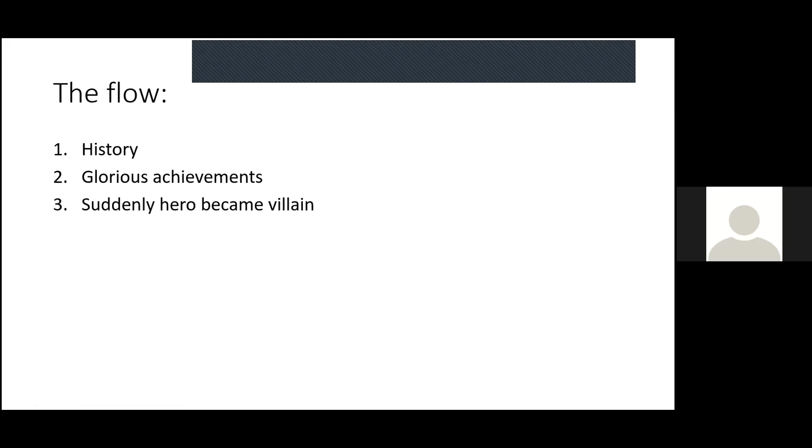Okay, concrete for future. Here we will discuss some of the upcoming types of concrete, starting with history of concrete. The flow will be somewhat like this: history, then glorious achievements, some of them. It's not possible to cover all of them. Suddenly, why the hero became villain, the need for alternatives, the efforts taken all over, our contribution and the conclusion.

So regarding history of concrete, we all, being civil engineers and dealing with concrete on an everyday basis, know almost everything about concrete. But sometimes it is required to refresh. So let us go back to 6500 BC. In UAE, the earliest recording of concrete structure: Nabataean traders in the region of Syria and Jordan created floors, housing structures and underground storages using concrete.

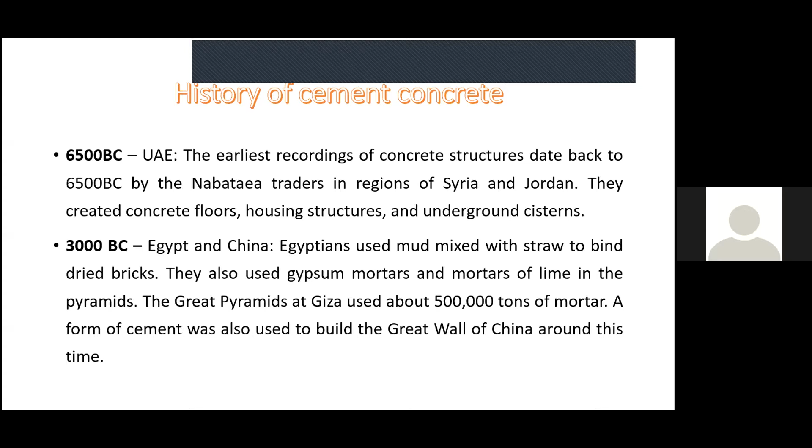Then in 3000 BC, Egypt and China. Egyptians used mud mixed with straw to bind dried bricks. They also used gypsum mortar and mortars of lime in the pyramids. The Great Pyramids at Giza used about 500,000 tons of mortar. A form of cement was also used to build the Great Wall of China around this very time.

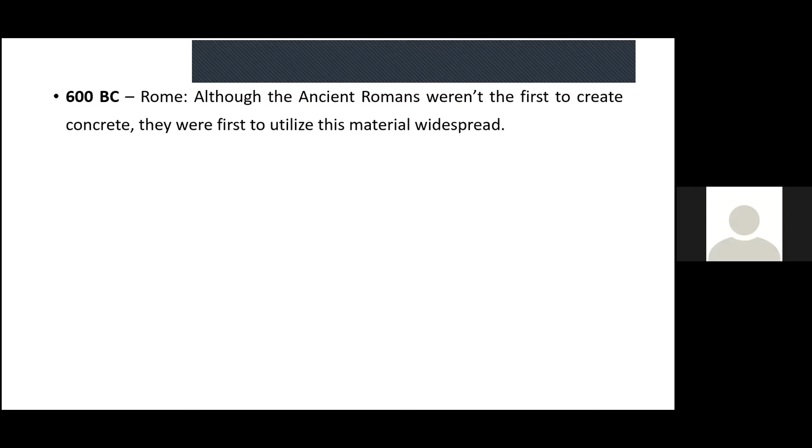Further in 600 BC, now we are coming towards present day. In 600 BC, Rome. Although the ancient Romans weren't the first to create concrete, they were the first to utilize this material widespread. By 200 BC, Romans successfully implemented the use of concrete in the majority of their construction.

They used a mixture of volcanic ash, lime, and seawater to form the mix. They then packed the mix into wooden forms and once hardened, stacked the blocks like brick. After more than 2000 years, Roman concrete structures stand tall due to their ingredients colliding with Earth's natural chemistry.

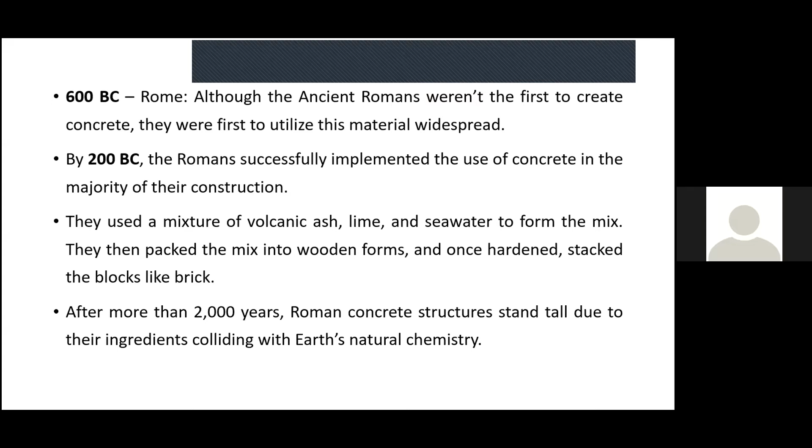Technological milestones. During the Middle Ages, concrete technology crept backward. After the fall of the Roman Empire in 476 AD, the technique for making pozzolana cement was lost until the discovery of manuscripts describing it in 1414. This rekindled interest in building with concrete.

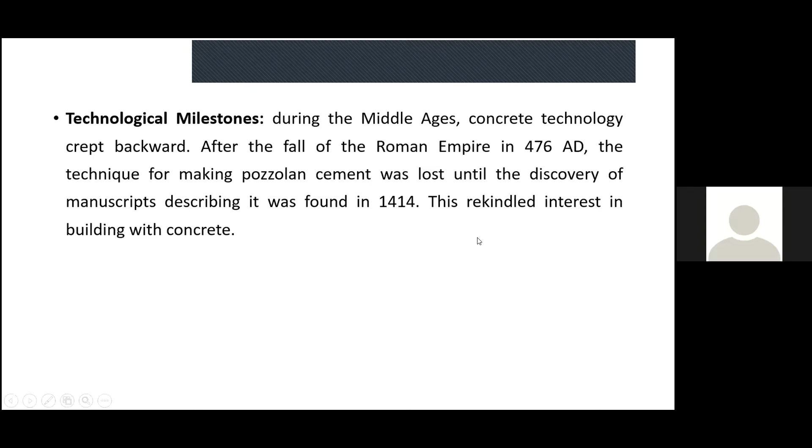In 1824, we all know this, Joseph Aspdin invented Portland cement by burning finely ground chalk and clay until the carbon dioxide was removed. Aspdin named the cement after the high quality building stones quarried in Portland, England. We know it as Portland cement because it was first made by using the quarry in Portland.

In the 19th century, concrete was used mainly for industrial buildings. The first widespread use of Portland cement in home construction was in England and France between 1850 and 1880 by Francois Coignet, who added steel rods to prevent exterior walls from spreading.

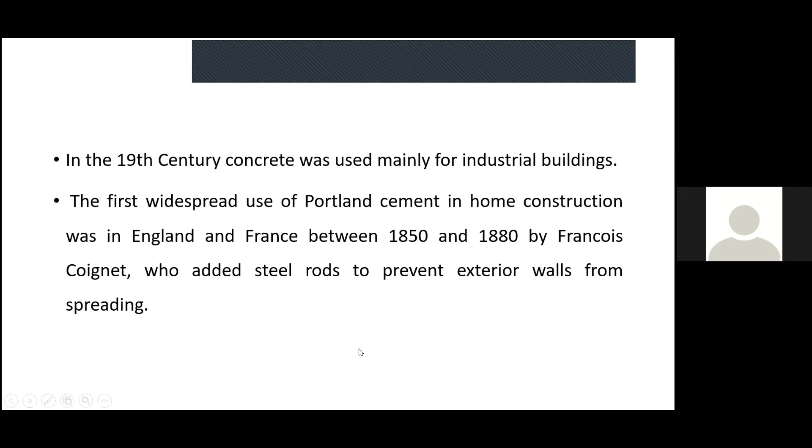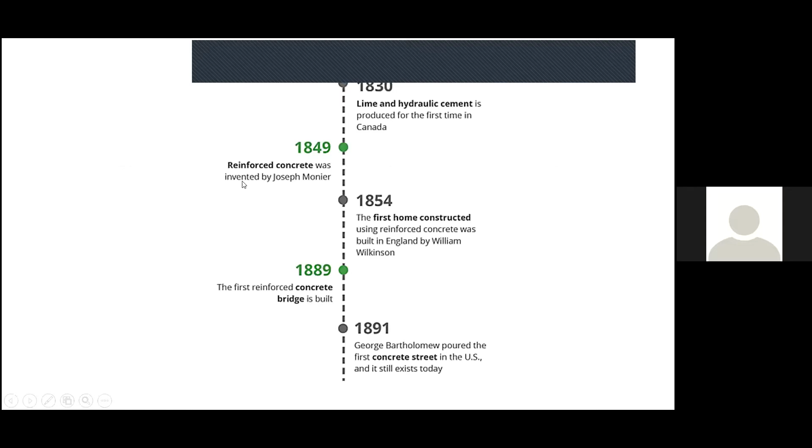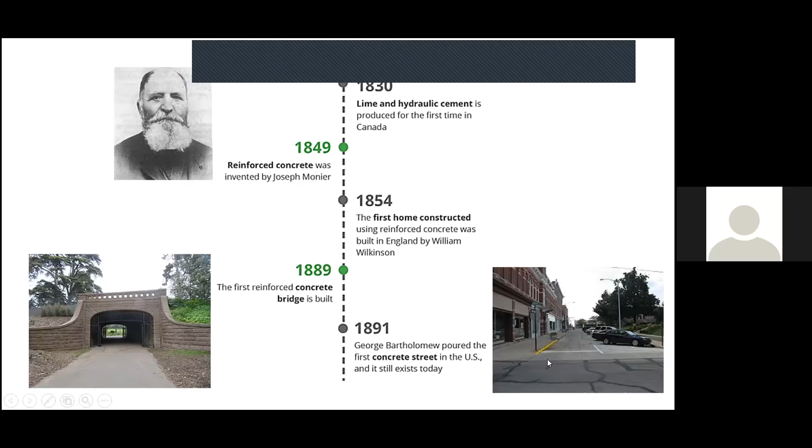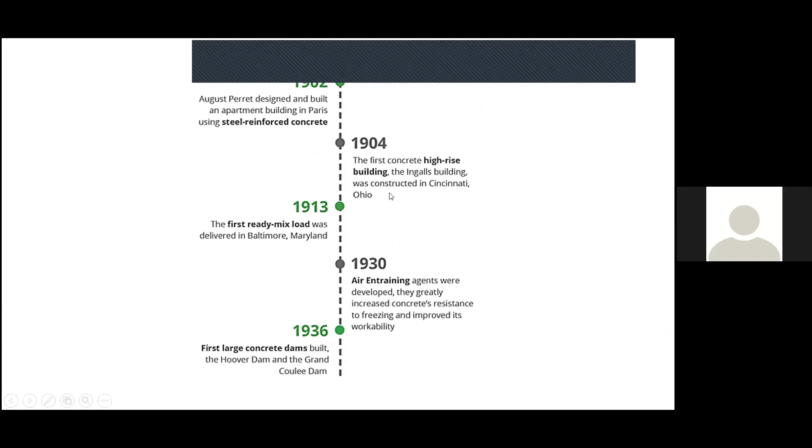In 1902, Auguste Perret designed and built an apartment building in Paris using steel reinforced concrete. The first concrete high-rise building, known as the Ingalls Building, was constructed in Cincinnati, Ohio. This is that building. It is a 16-story building, and it was constructed in 1904.

Then the first ready-mix load was delivered in Baltimore, Maryland. That was in 1913. And in 1930, air entraining agents were developed. They greatly increased concrete's resistance to freezing and improved its workability. It was according to their climate conditions, because in those countries the climate is very cold.

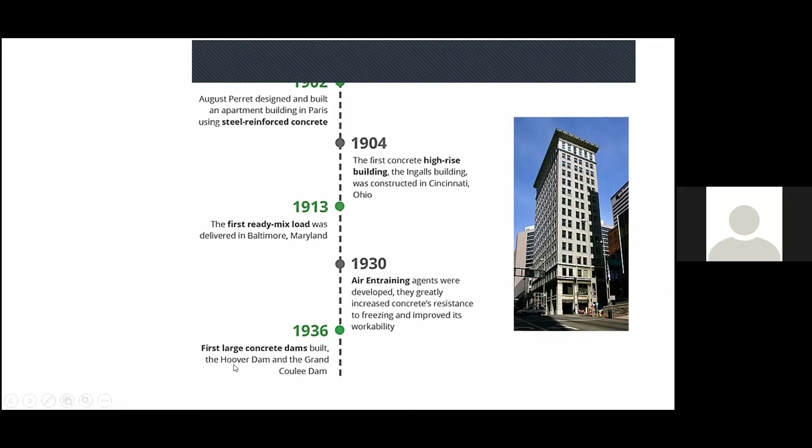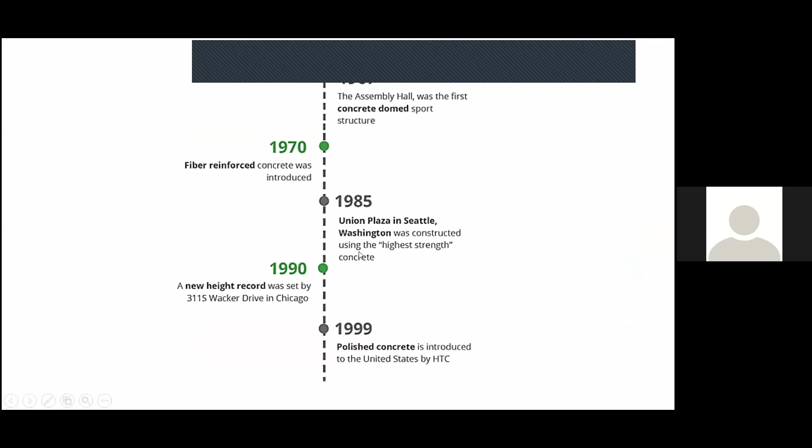Now, there were some inventions coming up with highest strength concrete. Then a new height record was set by 311 South Wacker Drive in Chicago. This is almost a 67-story building. And in 1999, polished concrete was introduced to the United States by HTC.

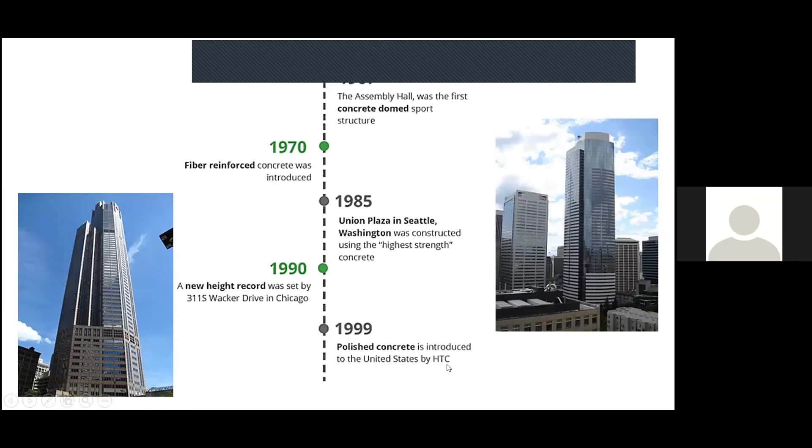Then in 2000, LEED was launched by the United States Green Building Council. And in 2003, the Solaire was the first green residential high-rise building in the United States. This building is fulfilling almost all the standards laid by LEED as well as the Green Council in the United States, and it has the pride of being the first green building.

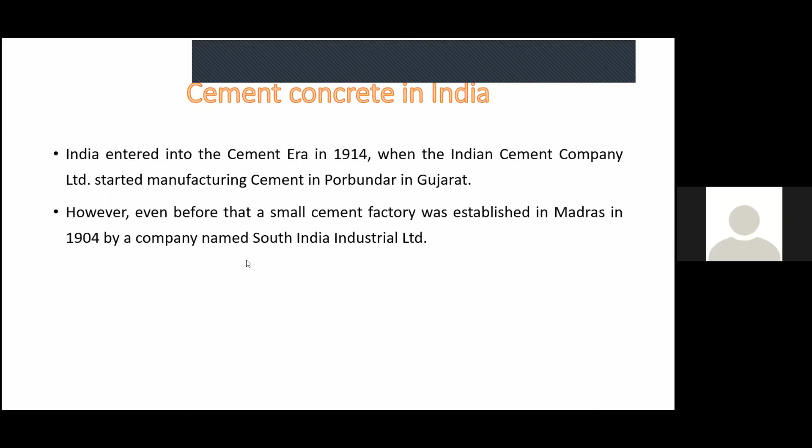Sorry for the interruption. Okay. Now, cement concrete in India. India entered the cement era in 1914 when the Indian Cement Company Limited started manufacturing cement in Porbandar in Gujarat. However, before that there was also one factory in Madras in 1904 by the company named South India Industrial Limited, but it was a small cement factory.

At that time, India had to import cement from England. The price of imported cement was higher, and some factors like domestic demand, reduction in supply due to war, availability of Indian capital, ample raw material, cheap labor, support of government, etc., made it a leading industry in India in a short period of time.

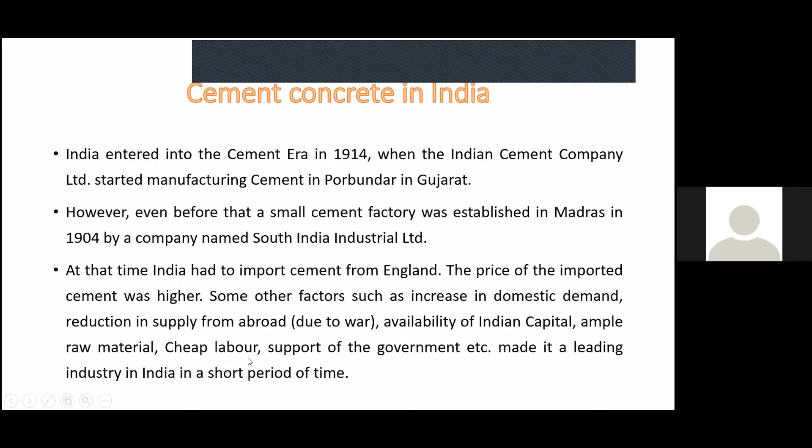In 1948, the government adopted the cement expansion scheme, which envisaged new factories to increase production. New factories were established at Bagalkot, Jaipur, Orissa, Travancore, etc. In 1950-51, there were 22 operating units with an installed capacity of 3.3 million tons.

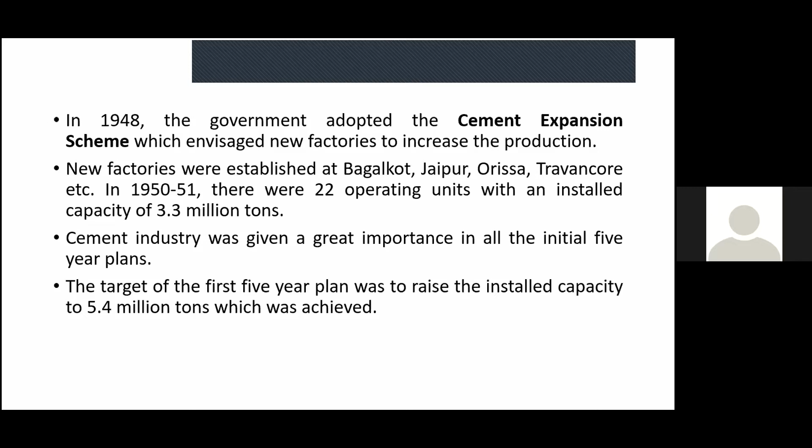The cement industry was given great importance in all the initial 5-year plans. The target of the first 5-year plan was to raise the installed capacity to 5.4 million tons, which was achieved. The industry has then grown many fold. Now, this hero of our construction industry has suddenly become a villain.

Yeah, please mute yourself. Participants are requested to kindly mute their microphone. Ganesh sir. Please mute yourself. Okay, am I audible now?

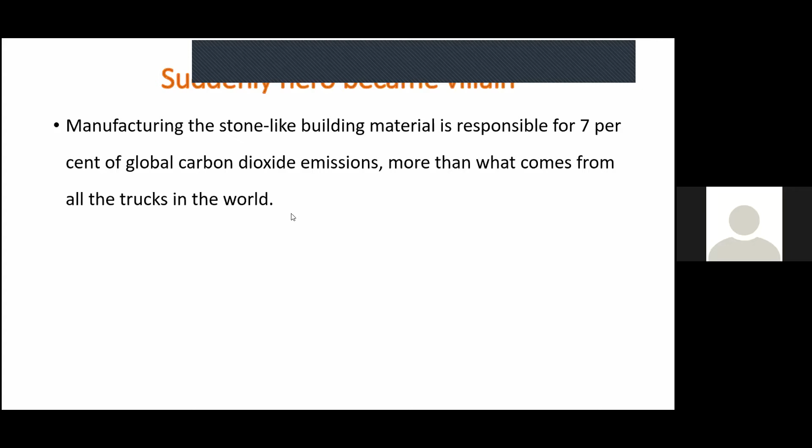Yes, sir. Okay. Manufacturing the stone-like building material is responsible for 7% of global carbon dioxide emissions, which is more than what comes from all the trucks in the world. Can we imagine this quantum? So if we stop producing cement, that one commodity would reduce 7% of global carbon dioxide. But it is not possible.

As per the survey conducted by the cement industry in India, cement production reached 329 million tons in financial year 2020 and is projected to reach 381 million tons by 2022. However, consumption stood at 327 million tons in 2020 and will reach 379 million tons by 2022. The cement production capacity is estimated to touch 550 million tons. So this is a big escalation of cement production.

In future, tremendous CO2 emission will be noticeable. So minimizing the carbon footprint has become a priority in every industry to slow down global warming and climate change effects. The very recent example of this global warming and climate change effect is what we have seen in Uttarakhand, right? A few days before in Chamoli district. That is again revolving around this only, global warming and climate change.

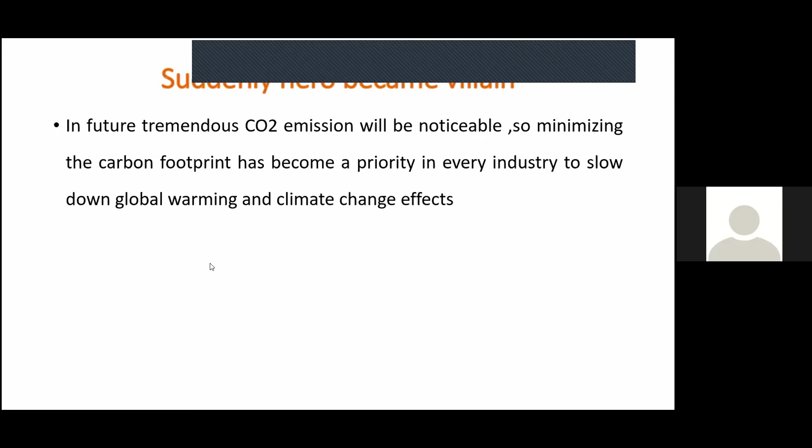So now, who is responsible? As we always say, to err is human, and to blame it on somebody else is even more human. Is that the way we should think? So who is responsible? The obvious answer is we. We are responsible for this. Why are we responsible?

Increasing greed. Almost all of us have more than one house. I think everybody will agree with this. One is at our working place, one is at our native place, and maybe one is a weekend home, and all these homes are constructed using concrete only. So that is how our greed is increasing. Another one, increasing urbanization. We are leaving the villages behind and rushing towards the cities. And again, we are constructing and creating a cement jungle only.

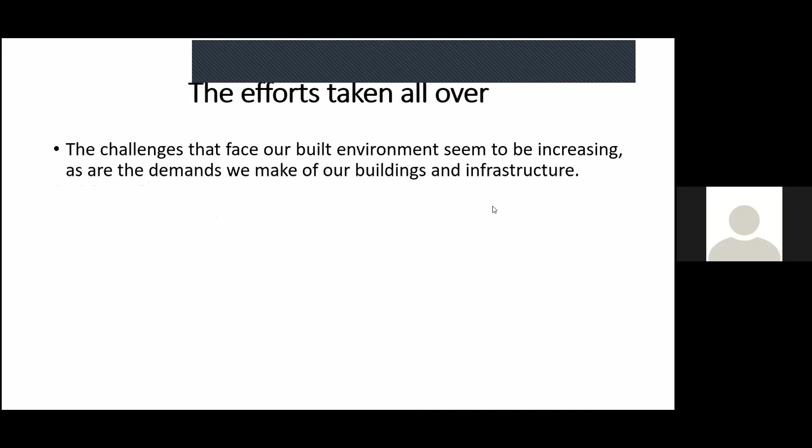So the efforts taken all over. What are those efforts, and who are those who have taken these efforts? The challenges that face our built environment seem to be increasing, as are the demands we make of our buildings and infrastructure. It is increasing day by day. We need robustness, solidity to feel safe and secure.

We must build in flexibility to climate change and be able to deal with overheating, flooding, storms, all in an increasingly urban environment where high density housing can make worse some of these issues. So as we are going towards urban, these issues are only increasing instead of decreasing. We must ensure solutions are low carbon, material efficient, and without compromising quality and performance standards such as fire safety and non-combustibility.

So a few innovations in concrete. The first one we can say self-healing concrete, then 3D printed concrete. There may be eco-friendly concrete, then pervious concrete, then Martian concrete, then living concrete, then use of graphene in concrete, then polymer concrete.

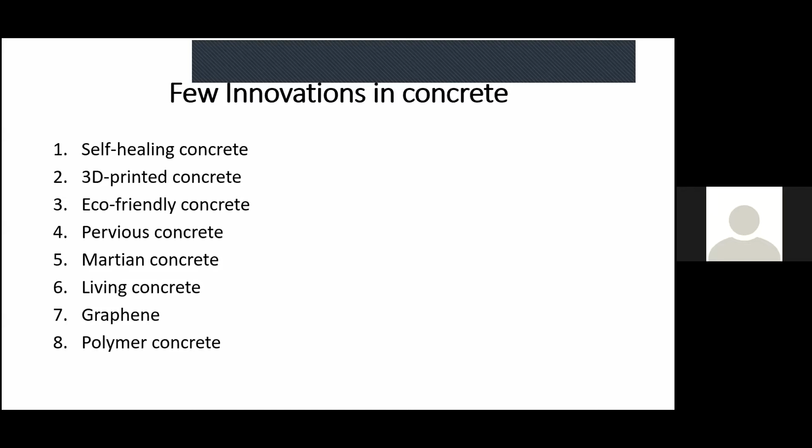Self-healing concrete, if we take one by one. No matter how carefully it is mixed or reinforced, all concrete eventually cracks, and those cracks can lead to collapses. That is why scientists at Delft University of Technology invented bioconcrete, a concrete that uses bacteria to heal itself. The bacteria generate crystals that enclose their cells, and when mixed with other secretions like protein and sugar, they generate a glue-like substance.

If the concrete cracks, the bacteria seal any gaps by forming either limestone or calcite. It is still in the research and trial phases, but the market for self-healing concrete has already been forecasted to reach 1,375 billion globally by 2025. So the final product has not yet come in the market. And personally, I know one of the experiments which was being done by my fellow research colleague at VJTI, but somehow it couldn't work out.

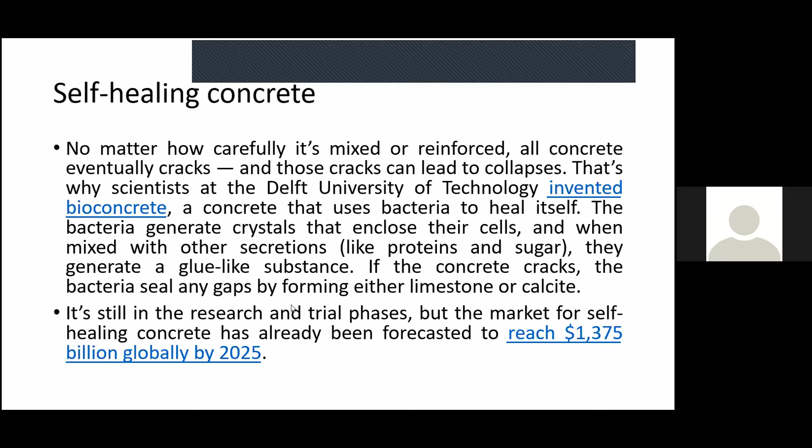Now 3D printed concrete. Recent developments in 3D printing have showcased an untapped potential to build affordable communities. Today 3D printed concrete can be used to quickly produce homes for the displaced or homeless, and the technology can often handle geometries that traditional construction techniques can't. 3D printing concrete also gives builders more creative freedom. Projects ranging from a backyard castle to a house built in just 24 hours have already been constructed using the technology.

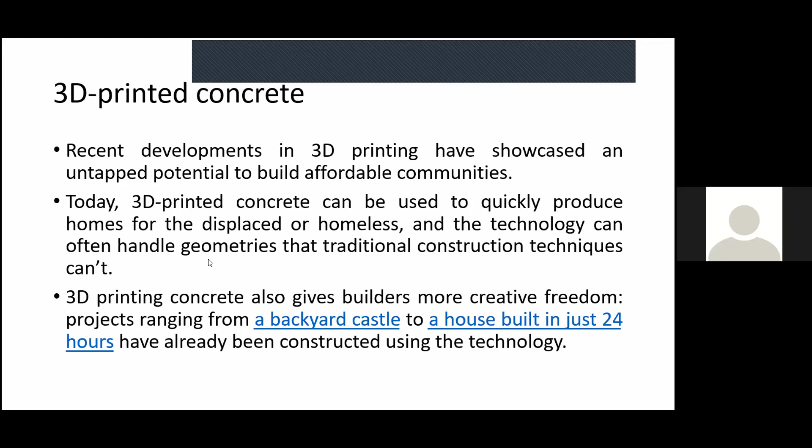Now there is one clip I have inserted in the presentation. It is a very small clip. We will

So this was a clip showing a 3D printer. By using 3D printing, we can make use of locally available material, and we can come up with an economical, eco-friendly housing system. That is also possible.

Now, eco-friendly concrete. Traditional concrete is not an environment-friendly material to make or use. However, scientists at London-based Novacem claim to have developed a new, more eco-friendly form of concrete using magnesium sulfate, which requires much less heating than typical concrete components. While concrete usually generates a large amount of carbon, Novacem claims that their concrete actually absorbs CO2 as it hardens. So it is exactly the reverse procedure. It will absorb CO2 from the surrounding environment.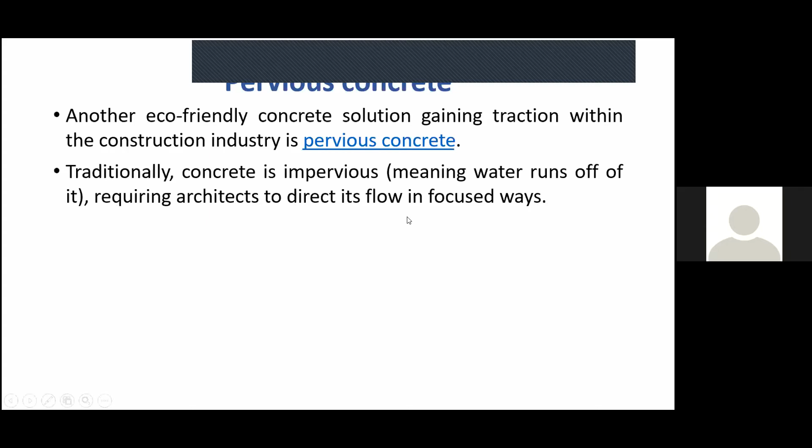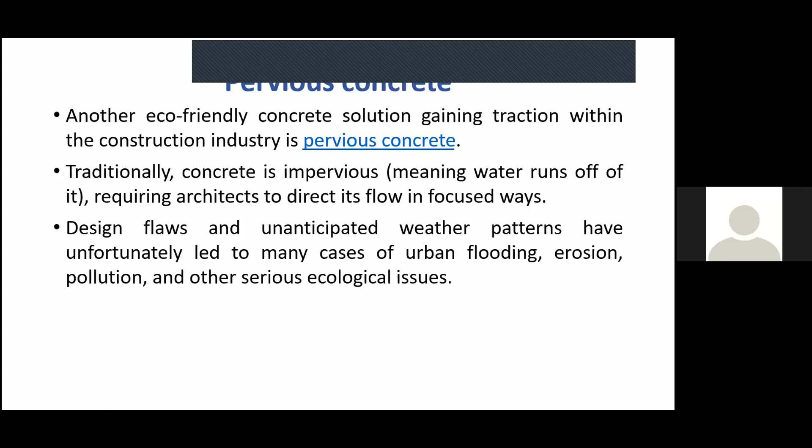Then pervious concrete, another eco-friendly concrete solution gaining traction within the construction industry. Traditionally, concrete is impervious, meaning water runs off it, requiring architects to direct its flow in a focused way. So you are supposed to take care of the slope of the floor, and if it is on the ground, then slope, otherwise there will be flooding. Design flaws and unanticipated weather patterns have unfortunately led to many cases of urban flooding, erosion, pollution, and other serious ecological issues.

Sometimes called porous pavement, pervious concrete is made of larger particles than traditional concrete. The large particles create voids within the concrete that allow for the gradual infiltration of rainwater into the ground below, providing a safer and more environment-friendly alternative.

This pervious concrete, in our institute, one of our teams has done experiments with this, and the team could create the pervious concrete very easily, and it has much more benefits, not exactly for the construction of slabs, but it is very, very useful for construction of pavements and other kinds of structures where the water should enter into the concrete and come out from the other side, so that there will be no flooding. And that experiment was very successful. So pervious concrete is one of the concretes we will be using in the very near future.

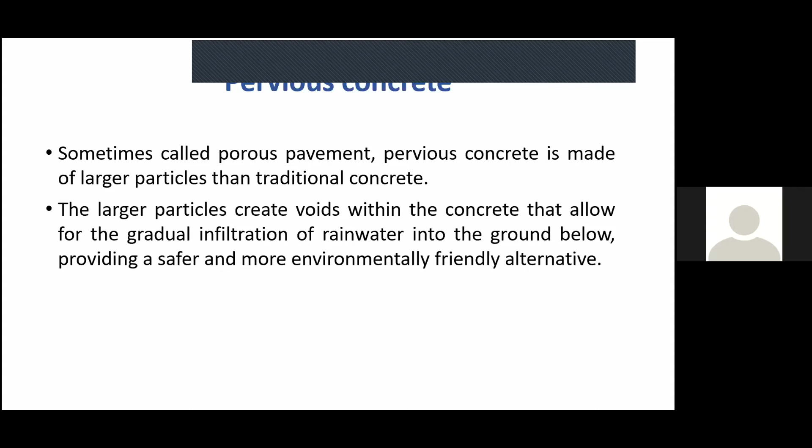Then Martian concrete, because now we are talking about Mars, and in the very near future we may go to Mars. In our generation, I don't think so, but the next generation definitely will go to Mars. Though it sounds like the stuff of science fiction, this concrete is real, and it may even be the best building material in the solar system.

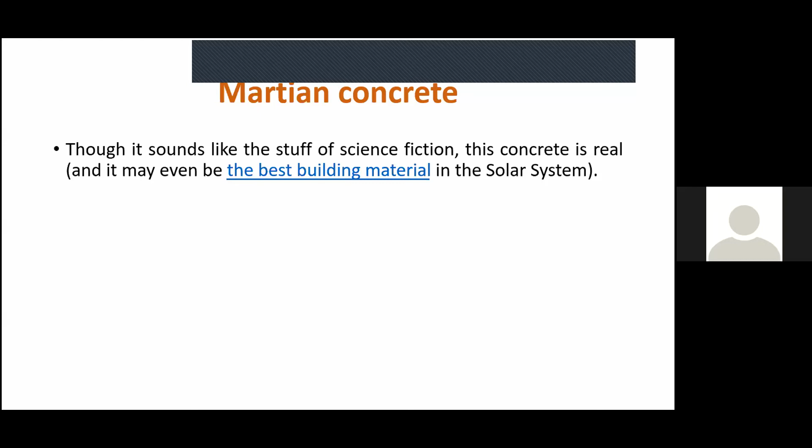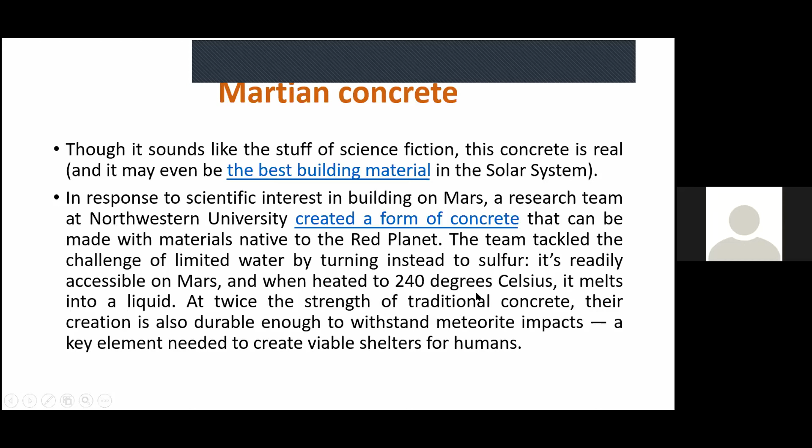In response to scientific interest in building on Mars, a research team at Northwestern University created a form of concrete that can be made with material native to the red planet. The team tackled the challenge of limited water by turning instead to sulfur. It is readily accessible on Mars, and when heated to 240 degrees Celsius, it melts into liquid at twice the strength of traditional concrete. Their creation is also durable enough to withstand meteorite impacts, a key element needed to create viable shelters for humans. So this, by using sulfur at 240 degrees, we will be discussing further in this very presentation.

So then living concrete. The living concrete developed by Bartlett School of Architecture, described as an architectural bark, can host species such as algae, mosses, and lichens to create more sustainable green walls that require no maintenance and potentially absorb pollution and noise in cities. In 2018, 8 prototype panels were installed at St. Anne's RC Primary School in London.

So we all know this algae, mosses and lichen; if you find them in dry condition, they become dry, but they do not die. The moment they come in contact with water, again they will grow. So this is living concrete. On these walls, actually this vegetation will live.

Then graphene, a game changer in making building with concrete greener. This is very interesting. This form of carbon incorporated into concrete created a stronger, more water resistant composite material that could reduce emissions. Graphene is a one atom thick honeycomb of carbon atoms with world beating mechanical, thermal, optical, and electrical properties. It has already been used for flexible electronics, energy storage, nanocomposites, sensors, liquid filtration, and thermal management. The use of graphene for all these things is known to us. We are using it, but now it is included in concrete.

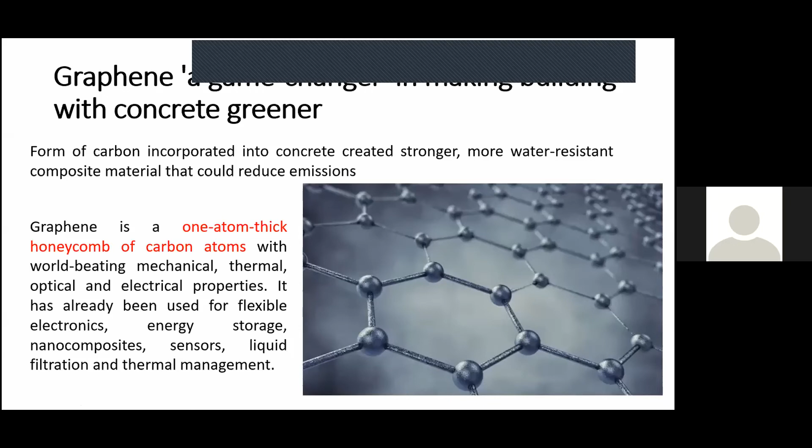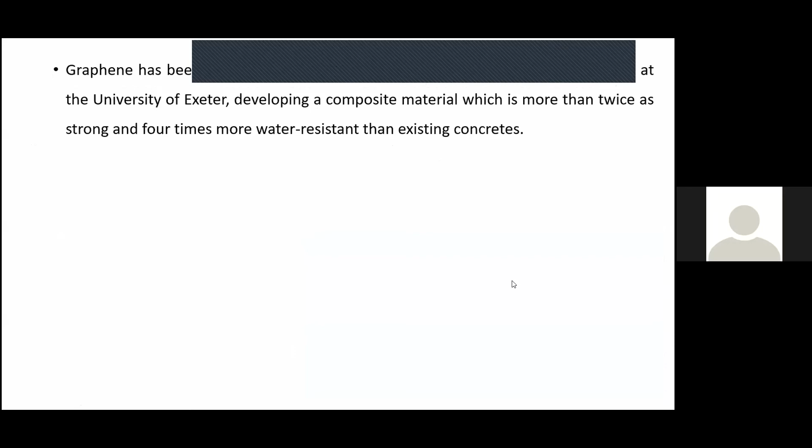So graphene has been incorporated into traditional concrete production by scientists at the University of Exeter, developing a composite material which is more than twice as strong and 4 times more water resistant than existing concrete. They demonstrated an extraordinary increase of up to 146% in compressive strength, up to 79.5% in flexural strength, and a decrease in the maximum displacement due to compressive loading by 78%. At the same time, they found an enhanced electrical and thermal performance with an 88% increase in heat capacity.

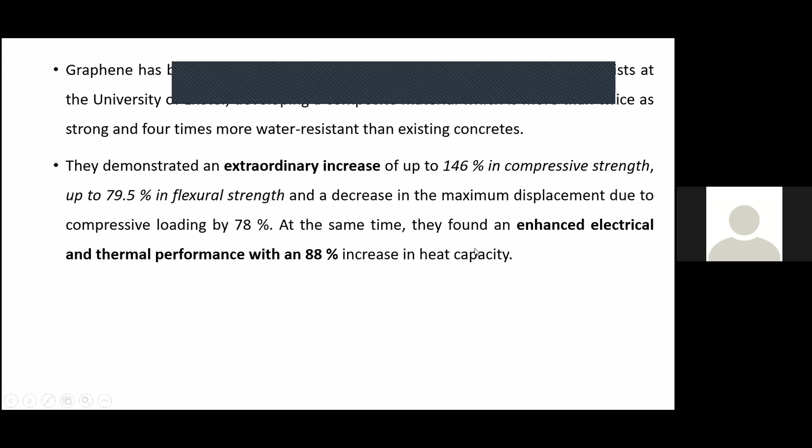So from every perspective of the concrete, this use of graphene is satisfying our requirement, and the composite could be used directly on building sites, enabling the construction of strong and durable buildings using less concrete and reducing greenhouse gas emissions. Using graphene means the researchers were able to roughly halve the amount of material used to make concrete. That means if we start using graphene, then we may bring down the carbon emission from 7% to 3.5% roughly. Even if we can reduce 3% globally, it is a great achievement.

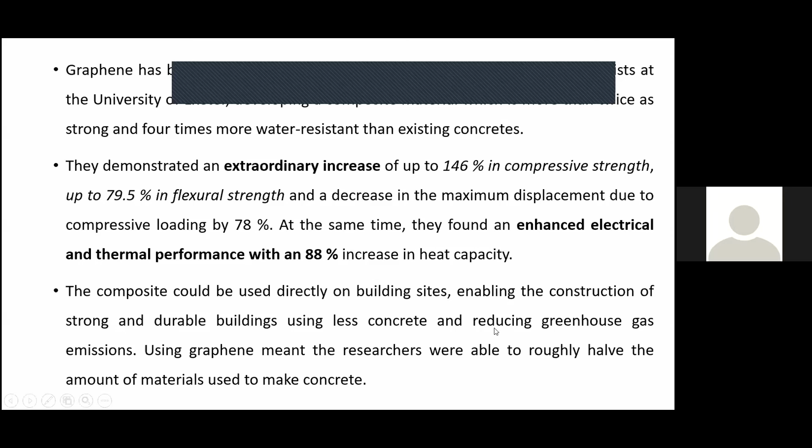Now to summarize, it is clear that there are numerous potential futures for concrete to continue as a material of choice in the design and construction industry. Having shaped our cities for centuries and facilitated rapid expansion and new heights, it is now time to consider how materials such as concrete can continue to support innovation by being the subject of innovation themselves.

The challenge for architects will be to ensure that such innovative solutions, with the potential to fundamentally change how we do or do not use concrete, begin to become accepted in a traditionally conservative industry. Otherwise, it is clear that the environmental impact of concrete in its current composition will see the material overtaken by its green competitors.

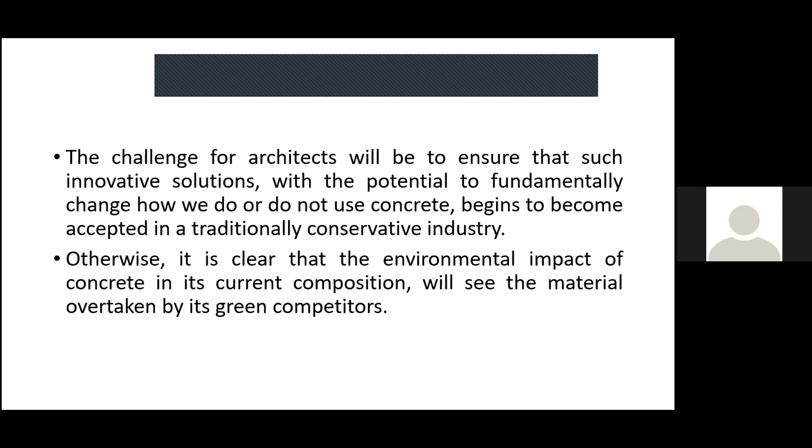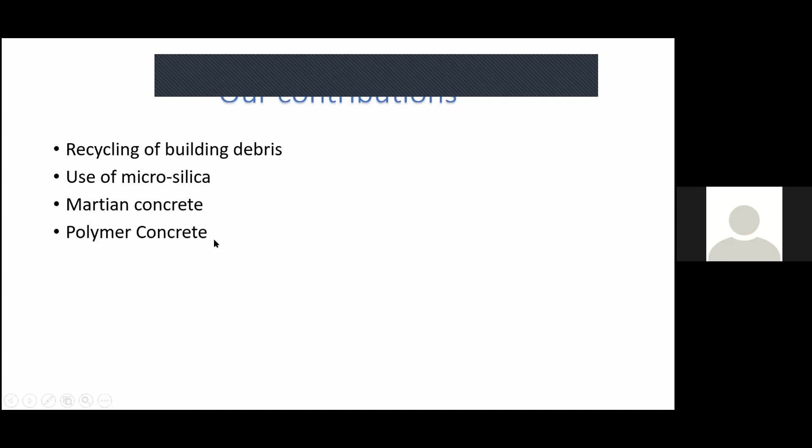Now, in this regard, what is our contribution? The recycling of building debris that we can do. We used microsilica, then Martian concrete is one of them, and polymer concrete. Here we will discuss the first three.

So recycling of building debris: there are so many experiments already being done. A lot of work has already been done by the researchers, right? If you take out some selected projects from a selected institute, you will find this recycling of building material is one of the projects that some of the students have taken up, but that is okay.

Results are amazing in many cases because we have done this in our laboratory also. So I can say that results are very good, but with the lack of a continuous supply of raw material, that is, quality building debris, this can be considered a supportive measure but not a fully sustainable solution. We cannot consider this recycling of building debris a sustainable solution. It is supportive, we can say,

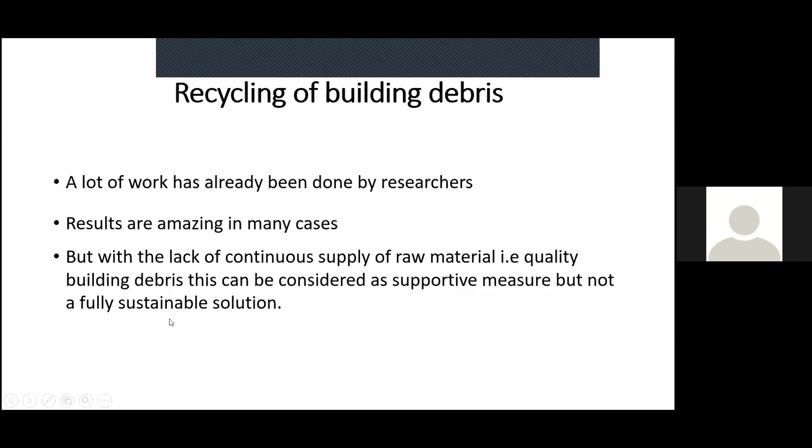because you will have to wait until you get some building in reconstruction, and then you can use the debris from that building. That kind of waiting period will be there. Then if there is no building within the vicinity going for renovation or reconstruction, you will have the question of where to throw those debris or transport them to, suppose, the next city, and that transportation cost will also increase, right? So this cannot be considered the sustainable solution, but definitely it is a supportive solution.

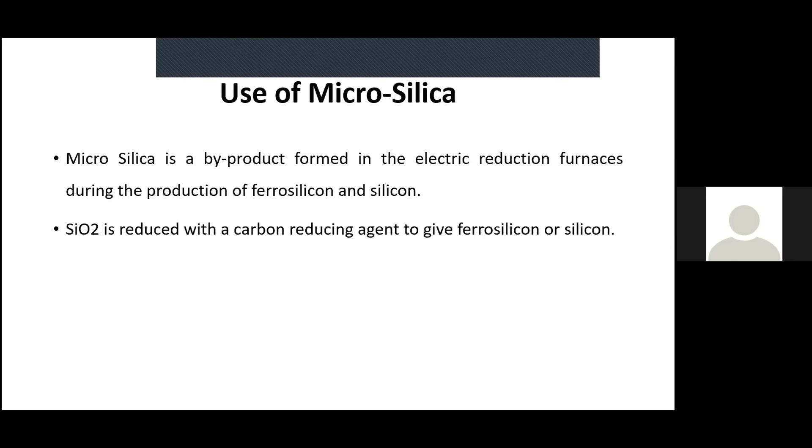Then use of microsilica. Microsilica is a byproduct formed in electric reduction furnaces during the production of ferrosilicon and silicon. SiO2 is reduced with a carbon reducing agent to give ferrosilicon or silicon. In the reaction zone, gaseous SiO is formed as an intermediate product. As the gas moves upward, a part of it is condensed in the cooler placed above the reaction zone.

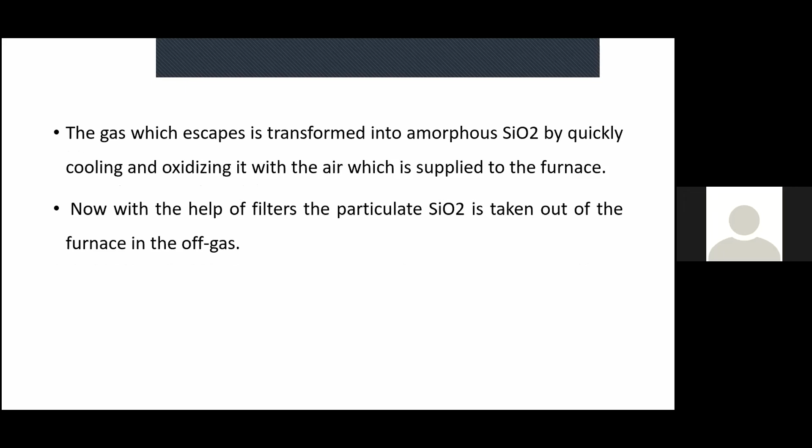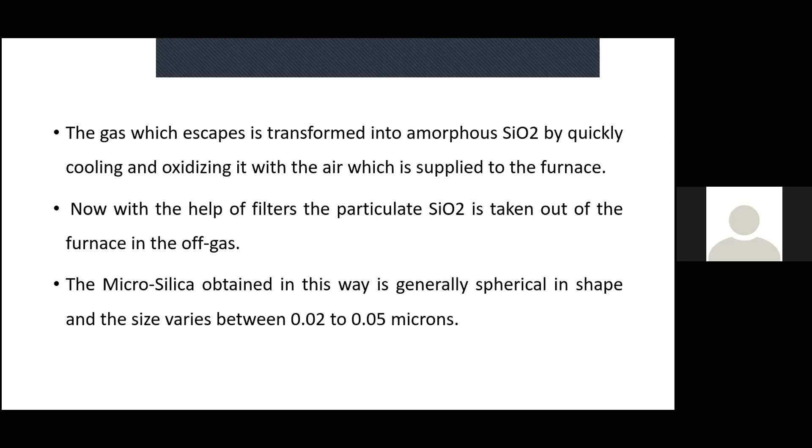The gas which escapes is transformed into amorphous SiO2 by quickly cooling and oxidizing it with air which is supplied to the furnace. Now with the help of filters, the particulate SiO2 is taken out of the furnace in the off gas. The microsilica obtained in this way is generally spherical in shape and the size varies between 0.02 to 0.05 microns.

Now, what are the benefits of microsilica? It significantly increases the durability of concrete. Microsilica reduces the permeability, increases ultimate strength gain, is beneficial in all types of high strength concrete, improves bond strength to steel, improves freeze and thaw durability of concrete, provides excellent resistance to sulfate or seawater attack, reduces the corrosion of steel, and significantly reduces alkali silica reactivity.

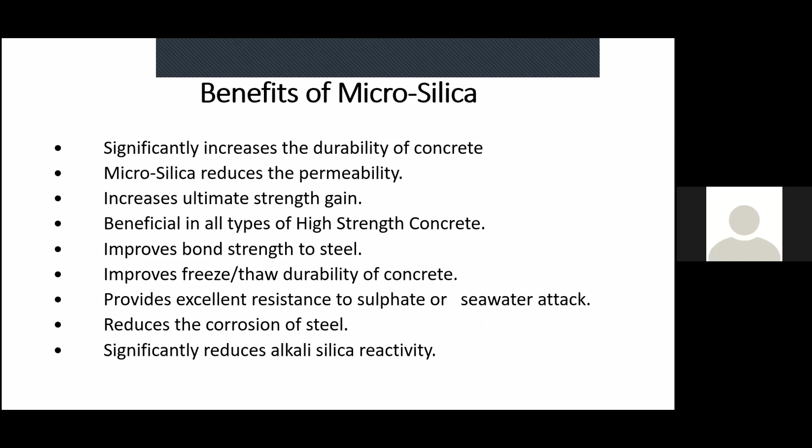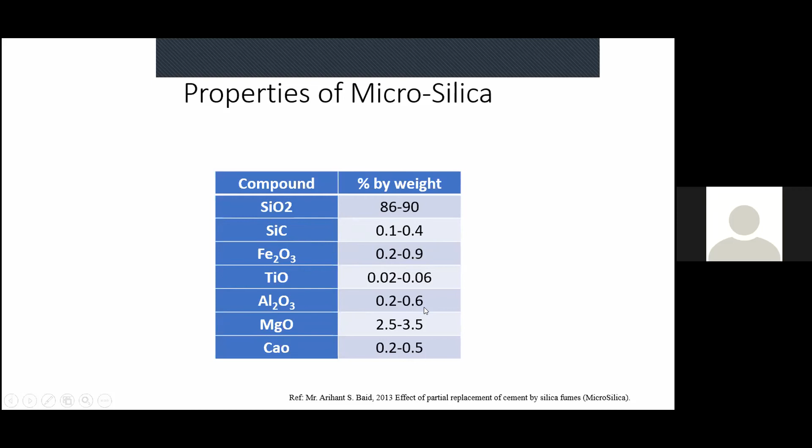So against those benefits, these are the properties of microsilica, taken as percent by weight. SiO2 is 86 to 90% by weight, and it contains 0.1 to 0.4 SiC and all these compounds in this proportion. And then we have conducted some experiments, and these are the results for the cube test performed.

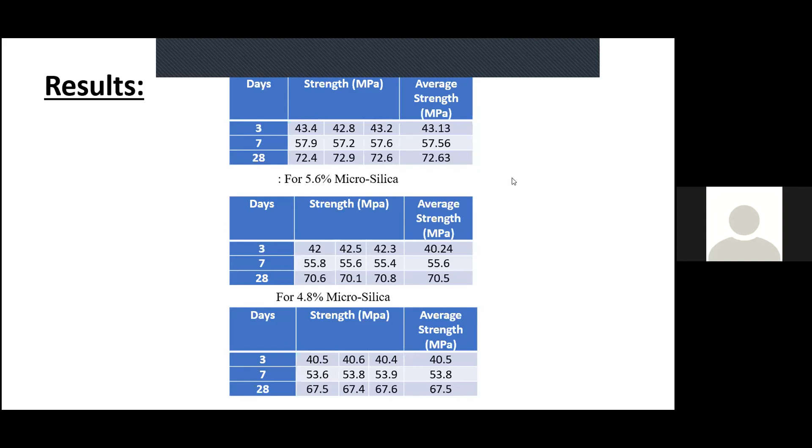We started with many different mixes which failed in some cases, but at 4.8% microsilica we started getting better results, and we have taken the results at 3 days, 7 days and 28 days of curing. At 3 days of curing, we could get an average strength of 40.5 megapascal when 4.8% was mixed. At 7 days it was 53.8 and at 28 days it was 67.5.

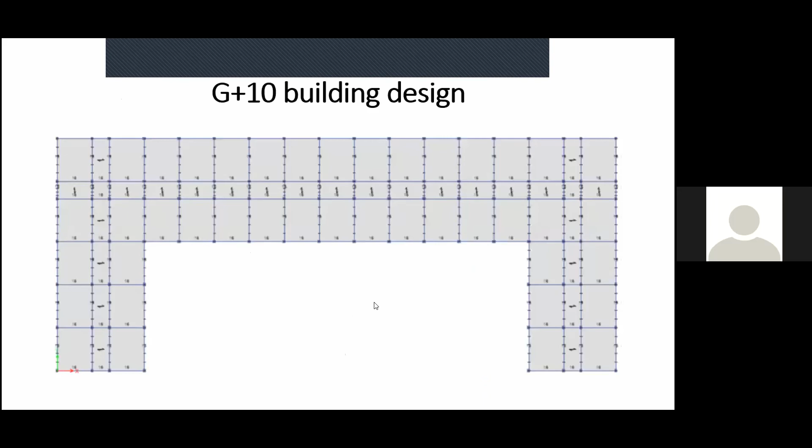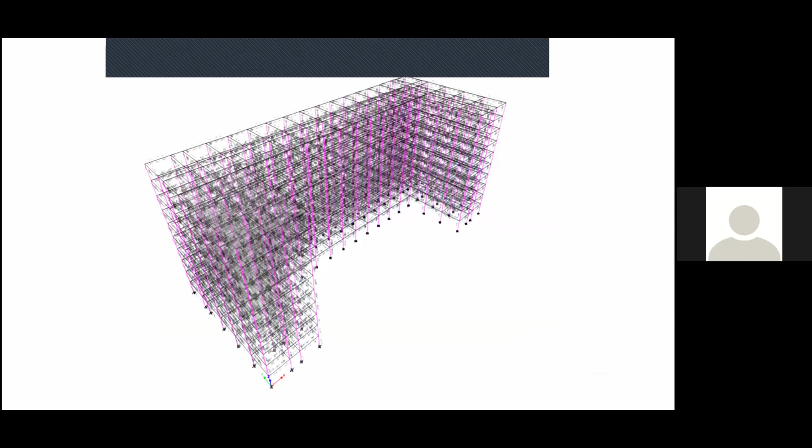Then we took one G+10 building of this C shape, and using ETABS designed this building for different concrete grades. One is what we designed using microsilica, and the others are M40 and M60. And then we compared the cost for the RCC skeleton only. The walls and windows and the other things are not included.

When it was M60 grade, we named it M60 grade microsilica. For the building I have just shown you, the skeleton structure total cost using the local DSR was 75,24,933. If we consider this as a datum, then for M60, that is M60 grade concrete using ordinary Portland cement, it cost 84,56,000, and here we can save 9,31,000 rupees for this particular building skeleton.

And if we are comparing with M40, then we could save 38,58,000 rupees. So using microsilica for just 6.4%, because general concrete grade is M40, and against that we are getting M60 microsilica grade, we can save almost 30 to 35% of cost in skeleton.

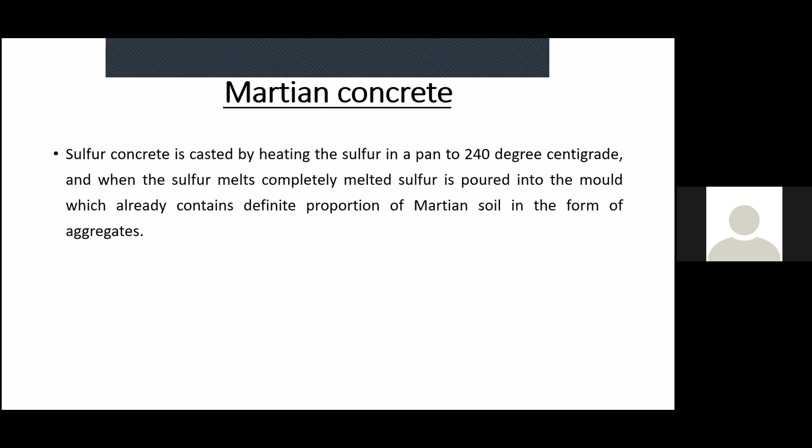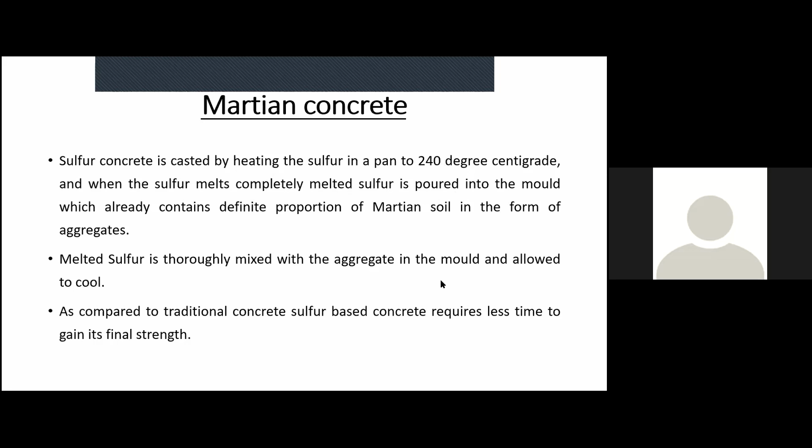But in this case, we are not using the Martian soil because it is not available right now, and that is why we are using whatever aggregates are available within the vicinity. So coarse and fine aggregates, and we are supposed to see some of the strength and porosity parameters. Because we are using sulfur in it, we have kept the name of the study as Martian concrete itself.

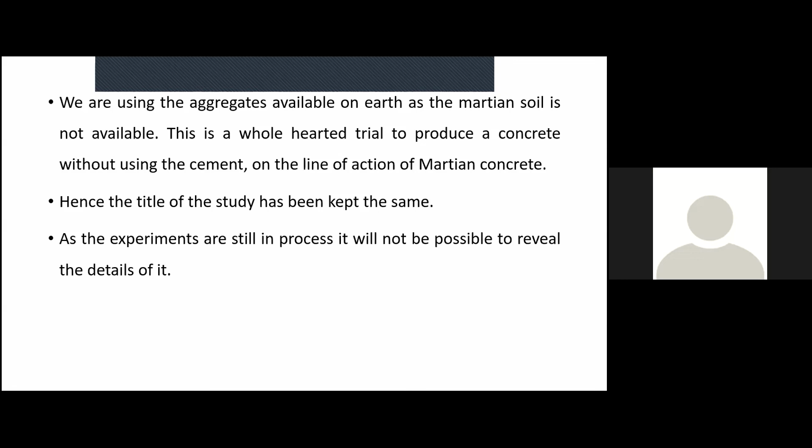As the experiments are still in process, I'll not be able to reveal all the details, but very soon we will publish a paper in a good reviewed journal.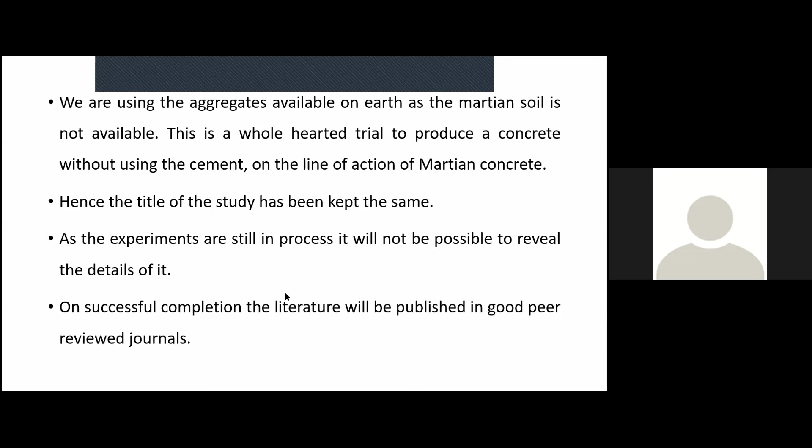So this is all from my side, and at the end I would like to say we are doing our bit. What about you?

So is there any question? We can discuss some of the questions or any inputs, because I think all of us are dealing with concrete every day, and we know that classroom learning of concrete technology is the most boring thing, but laboratory experiment on concrete is very interesting. So it should be learned in the laboratory itself.